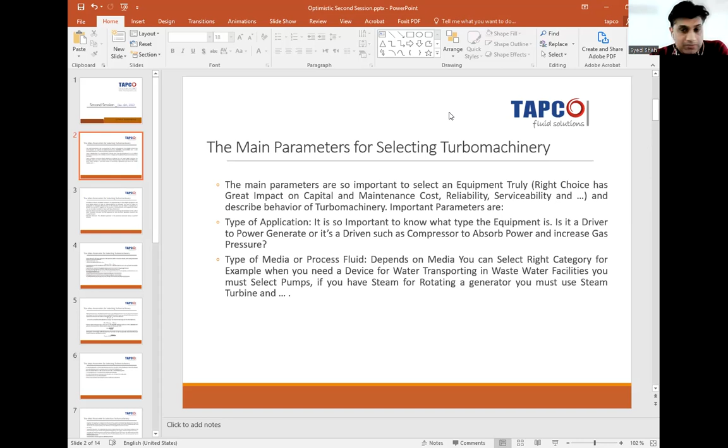Condition of the fluid is an important key to having the right equipment, and it has a major impact on the type of machinery. For example, you must select equipment to compress natural gas. In this situation, you can select a compressor, a blower, or a fan, but it depends on the pressure ratio and capacity or flow.

We can describe the condition of the flow with flow parameters. Pressure is the name given to the force exerted by fluid particles on the wall of the container. Pressure can be expressed in two methods: absolute pressure and gauge pressure. It's so important, since we're working with different pressures, for example static pressure, dynamic pressure, total pressure, and others.

We don't want to speak about this parameter now, since it will come soon, and after that we will discuss it completely.

Absolute pressure is the pressure measured above a perfect vacuum. Gauge pressure is the pressure which is measured directly, with existing barometric pressure, at zero base reference.

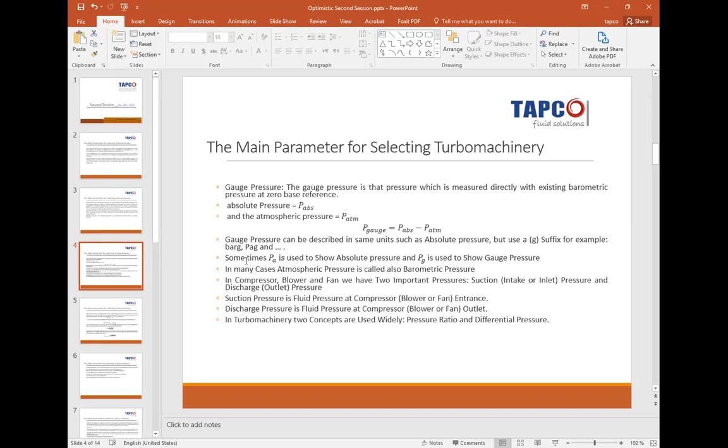Differential pressure is the difference between any two pressures measured with respect to a common reference, for example, differential pressure between two absolute pressures. It's expressed in pressure units without any suffix; we can show it with bar, Pascal, and other units, and represent it with the symbol delta P.

Delta P equals P2 minus P1. P2 and P1 must be either both absolute or both gauge. One should not be gauge and the other absolute. It's so important to use it only in one consistent concept.

For pressure ratio, we can define delta P in the compressor, blower, fan, pumps, turbines, and other equipment with these definitions: Delta P equals discharge pressure minus suction pressure. Pressure ratio is the ratio of the absolute discharge pressure to the absolute inlet pressure.

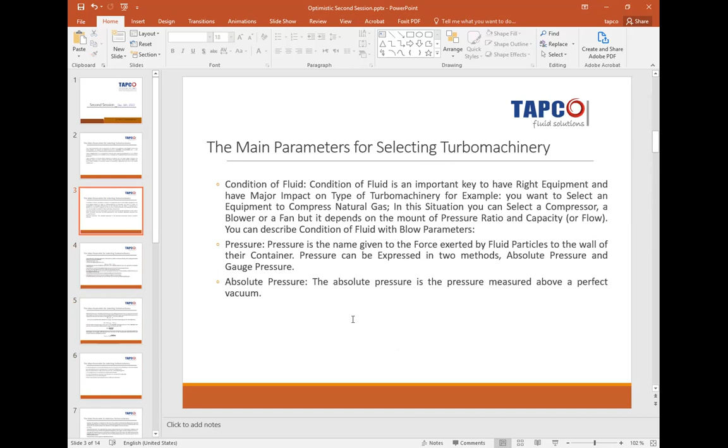Pressure ratio is a dimensionless value, shown with PR. It's so important that it's dimensionless. Pressure ratio equals discharge pressure divided by suction pressure, and there is an important point here again.

When we calculate pressure ratio, both discharge pressure and suction pressure must be absolute. This is important: if you divide discharge pressure by suction pressure in gauge, you get a wrong pressure ratio that cannot be relied on. So it's very important to make sure that whenever you calculate pressure ratio, both discharge and suction pressure must be in absolute.

But when you want to calculate differential pressure, both discharge and suction pressure, at the same time, could be either absolute or gauge. Is it clear? Yeah, it's clear, okay, should be good, both should be the same for delta P. For pressure ratio, both must be in absolute, not gauge.

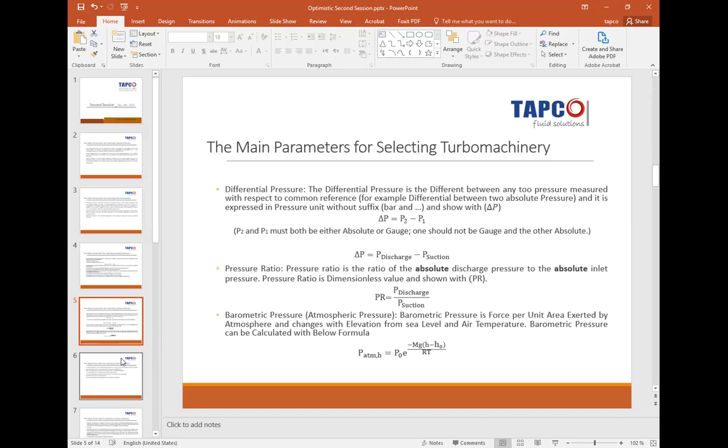You can calculate the barometric pressure with this, but it's not necessary because many sites on the internet let you calculate barometric pressure easily. I will show you.

In this formula, P with suffix 0 is the sea level pressure, equal to 101.325 kilopascal absolute, or 1013.25 millibar absolute. G is the acceleration due to gravity, equal to 9.80665 meters per square second.

M is the molar mass of air, equal to 0.0289644 kilogram per mole. T is the temperature at sea level, expressed in Kelvin. We will discuss about it.

R is the universal gas constant, equal to 8.31432 Newton meter per mole Kelvin.

Is it necessary to use this formula? No. For example, this site can calculate the barometric pressure for you easily. I will show you.

You never actually need to use that formula to get the atmospheric pressure at different sites, because there are so many tables, graphs, and even calculators that you can use to easily calculate the air pressure, or atmospheric pressure, or barometric pressure - those are the same. You can calculate them easily for different sites, different places. That's correct.

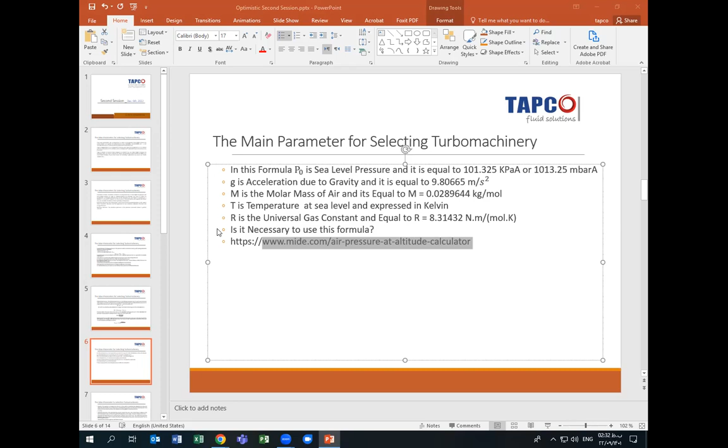I would recommend this to you from now on. I know this is going to be difficult, especially if you have not practiced it before, but my own practice tells me that if you try to understand the process, life will be much easier for you. Believe me, I know this is not very easy to do at first.

But if it starts with very simple processes and you try to understand the process, what do I mean by process? Always ask yourself what this machine that I'm going to offer is supposed to do. What is its job? What is the requirement for this machine? How is this machine going to be used?

How is it utilized by the client? In what process? What is that going to develop or generate, to give out? This is called process. If you understand the process, it will be much more understandable to you, the device that you want to design, select, and hopefully sell.

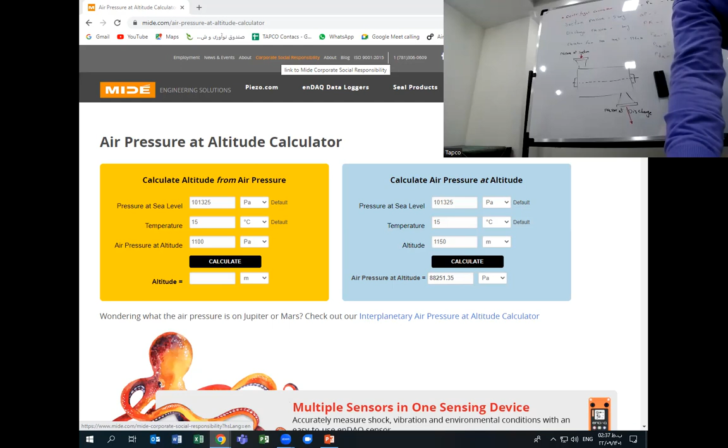How is it now? Is it okay now? Is it readable? No, it's not readable. If we close the presentation we are sharing, your screen will appear on the main screen, because now it's on the right side with a small screen which we cannot read. I'm not sure if I can convey my question. Yeah, if you can stop... Okay, yeah, it's much better now. Thank you, now we can see it.

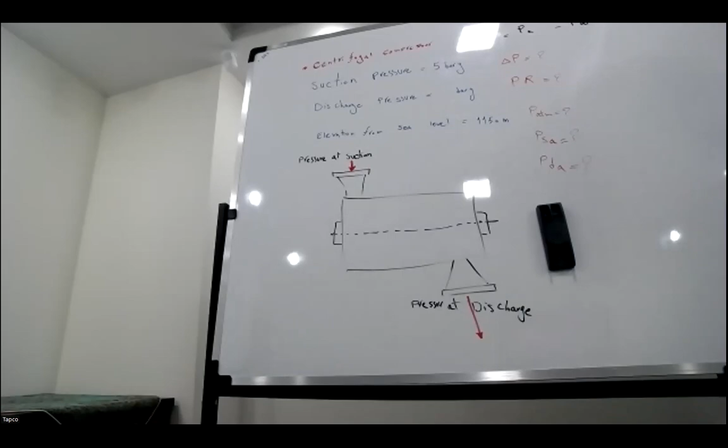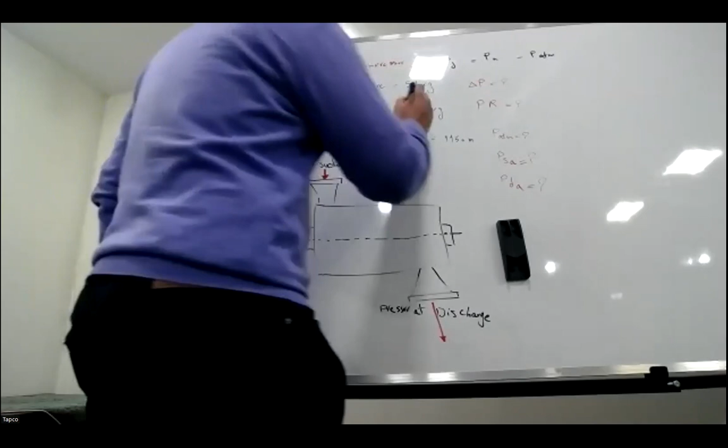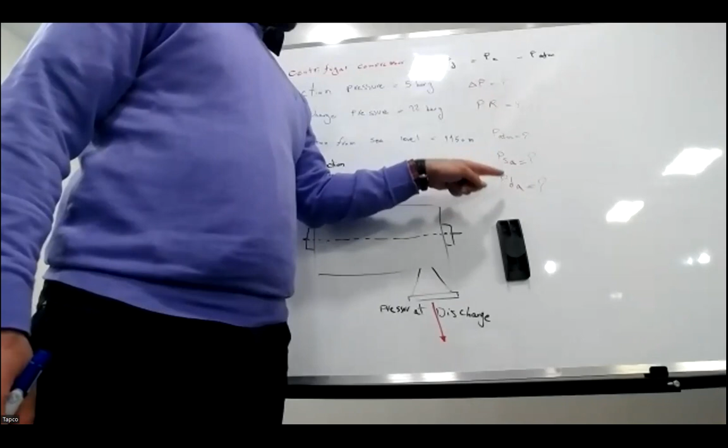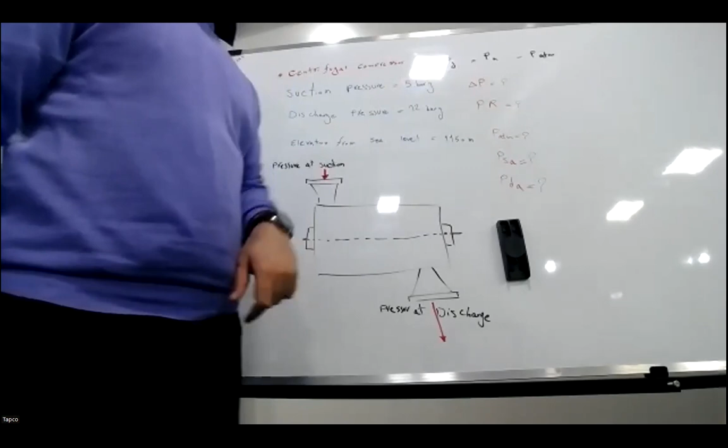We have a centrifugal compressor here with suction pressure 5 bar with suffix G, and the discharge pressure is 12 bar G. I asked you to calculate the suction pressure and discharge pressure in absolute terms, and after that calculate the pressure ratio and differential pressure. This compressor will be installed in a city with elevation from sea level of 1150 meters.

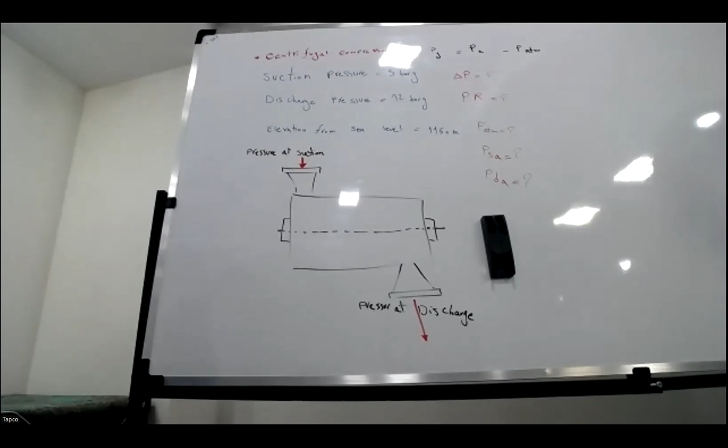Is the problem clear to you? We can see it, not very clear, but we can see it.

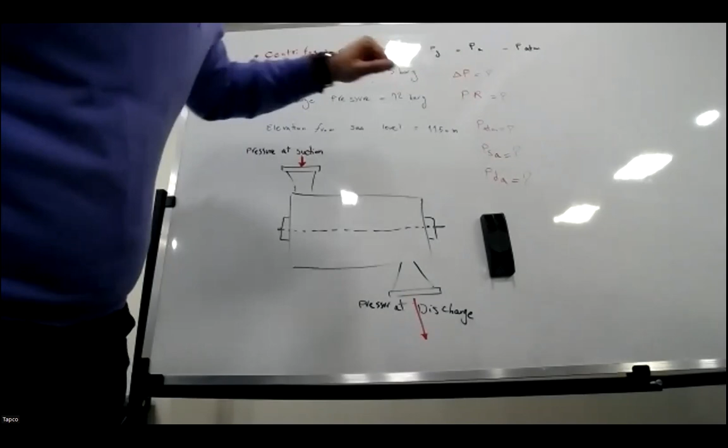Suction pressure is 5 bar G. Okay, discharge pressure is 12 bar. Suction pressure is 5 bar G, G means gauge, all right? And discharge pressure is 12 bar G.

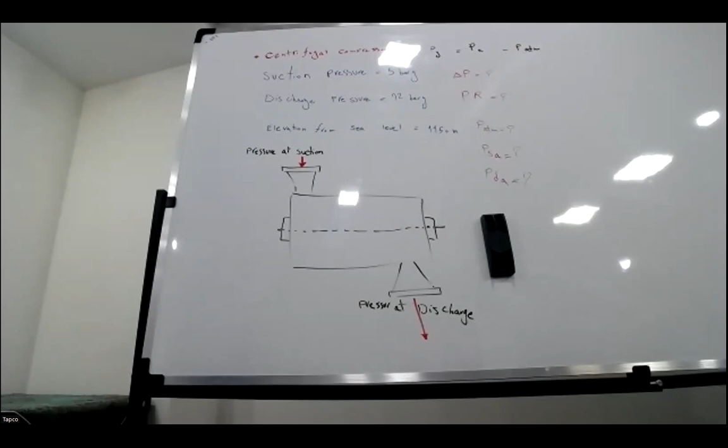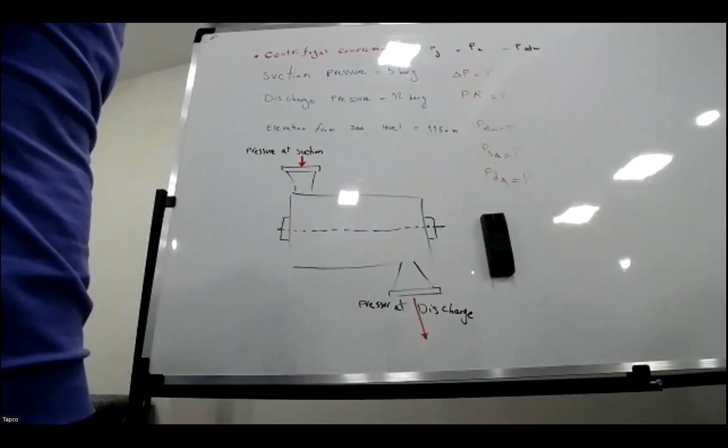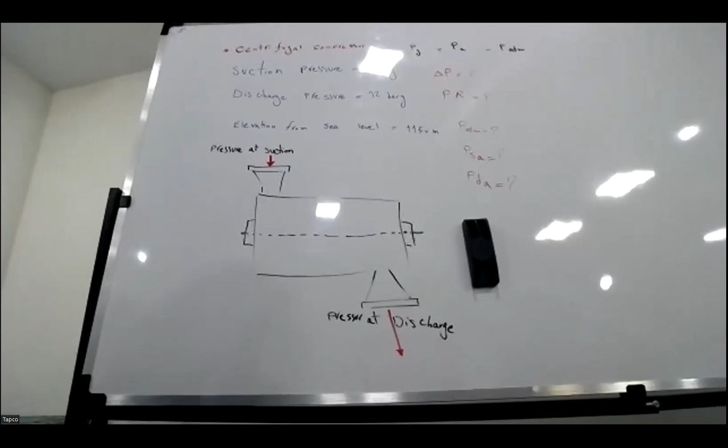So what do we need to derive now? Okay, and you need one more piece of information: the site elevation, the altitude at the site is 1150 meters above sea level. The first thing you actually need to know or to reach is the atmospheric pressure at the site.

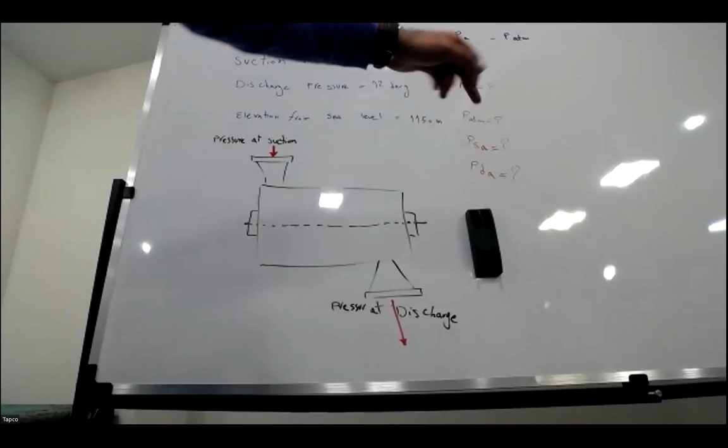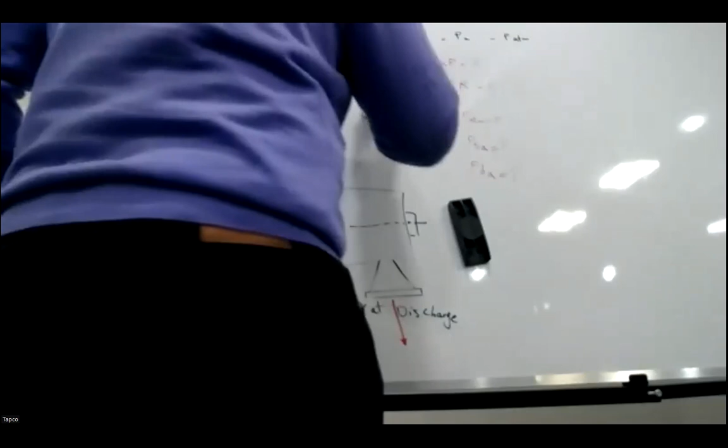And what other things need to be understood and adopted in order to calculate the discharge pressure? Is it 12 bar or 20? 12. No wait, 12 bar G, yes.

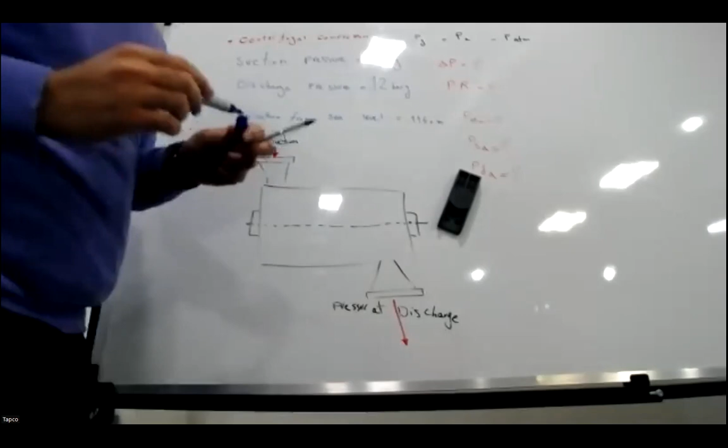And what do we need to derive, what do we need to get as the result? Pressure ratio, should we calculate the differential pressure, suction pressure, and discharge pressure in absolute terms, and atmospheric pressure.

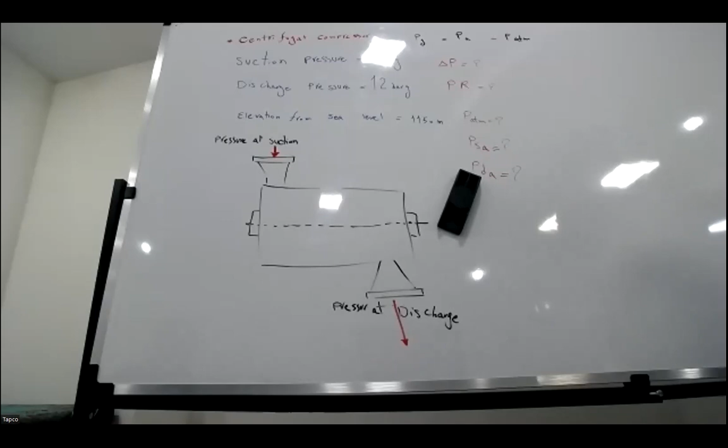So the differential pressure is 7 bar G. Yes, correct, but thank you for making a small mistake, because if you hadn't made this mistake, I would have forgotten to mention this typical type of mistake. Correct, of course the differential pressure is 7 bar, but we never say differential pressure is so many bar G or A, never. It is simply 7 bar, no suffix, no unit involved.

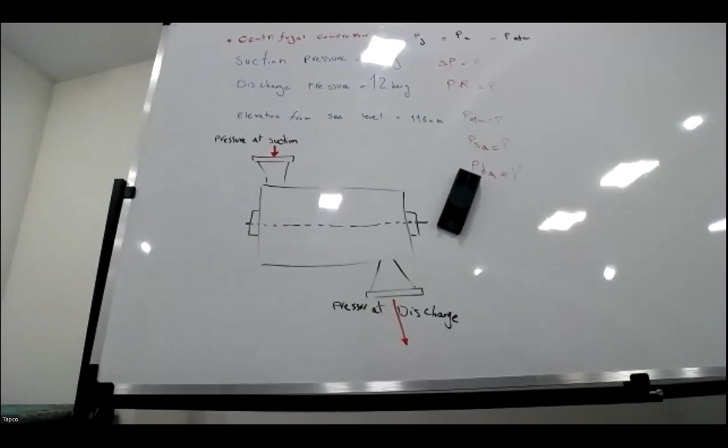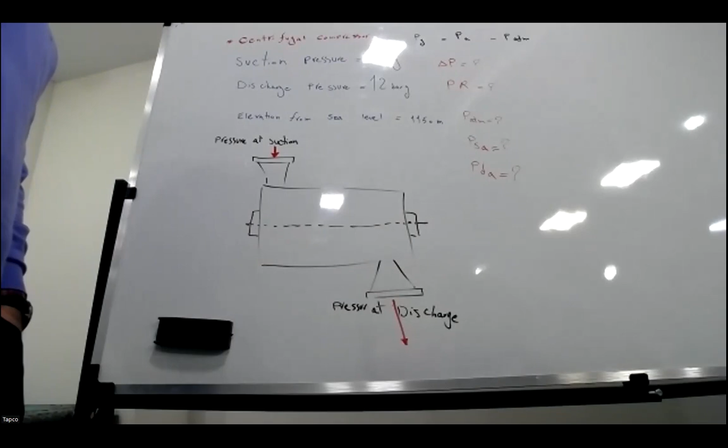No suffix after, when we say differential, both sides are either gauge or absolute. Am I correct? Differential means A minus B, P2 minus P1, all right? P2 and P1 are both either in gauge or absolute. If they are gauge, gauge from this side and gauge from that side cancel out. What remains is just bar. We never say differential pressure is 7 bar G, if it is gauge, it is not differential. We simply say 7 bar, or millibar, or Pascal, or bar, or atmosphere, or millimeters of mercury, or millimeters of water. These are all units for pressure, and there are even more.

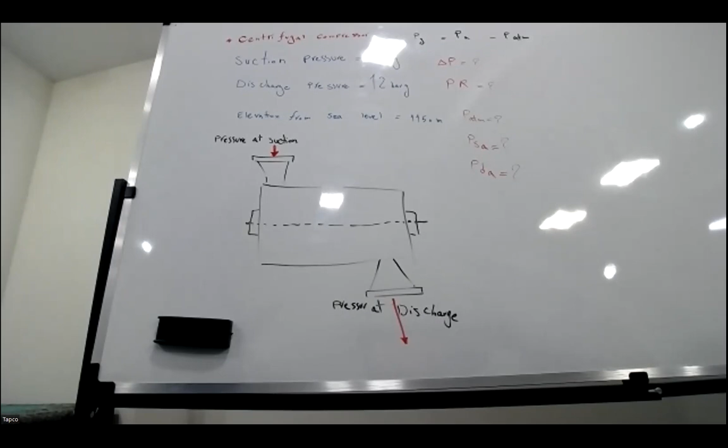So, and the pressure ratio is 2.4? No, no, sorry, please go back to the definition of the pressure ratio, please. Oh okay, it needs to be calculated with the absolute values. Exactly, this is extremely important. When you calculate it, you will see that it won't be 2.4, and that could have a huge effect or impact on the later calculations.

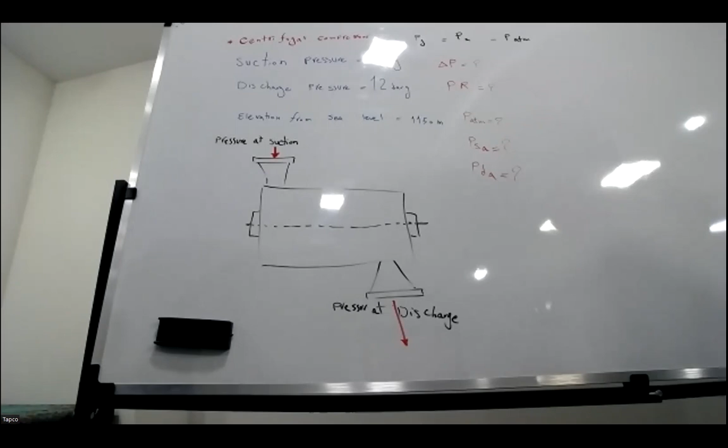Okay, ladies and gentlemen, if I'm allowed to give you a little hint. Do you hear? The one bar G is equal to how much 1 bar A?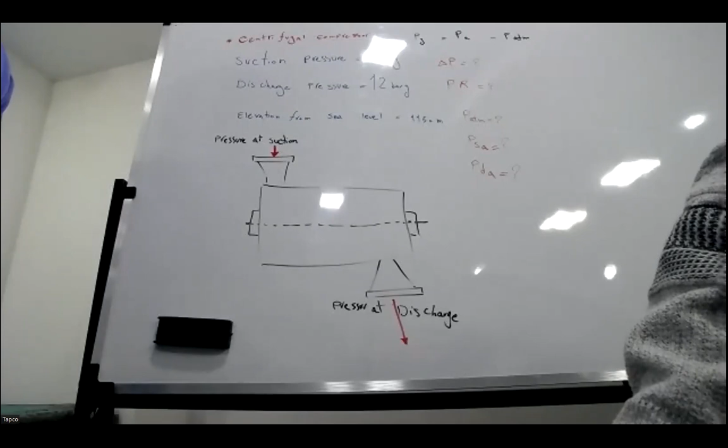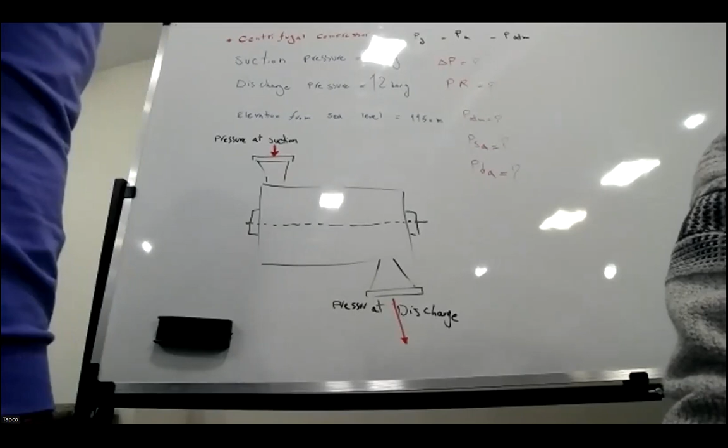Why do you need to know how much 1 bar G is? Because I want to calculate the bar G to bar absolute, then we could have our pressure ratio. That is why Mr. Ranchbarian has given you the elevation from the sea level. The elevation, the altitude, is 1,150 meters.

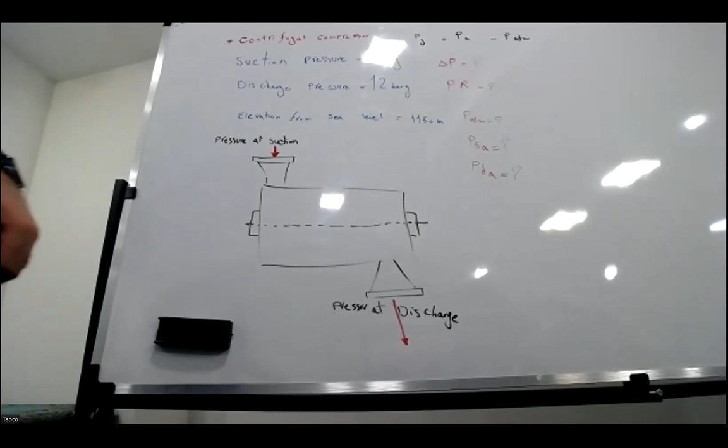That's correct. So what you need to know from that, I think it was slide 4 or 5, those graphs in blue and yellow. If you go over there, you can calculate. If you put the amounts in the boxes, you get the amount for the pressure at the site, at the elevation of 1,150 meters, and assume 15 degrees centigrade, 0 degrees centigrade. What it is there is not that important at the moment.

Okay, can you see this screen now? Yeah, we can. Okay, please.

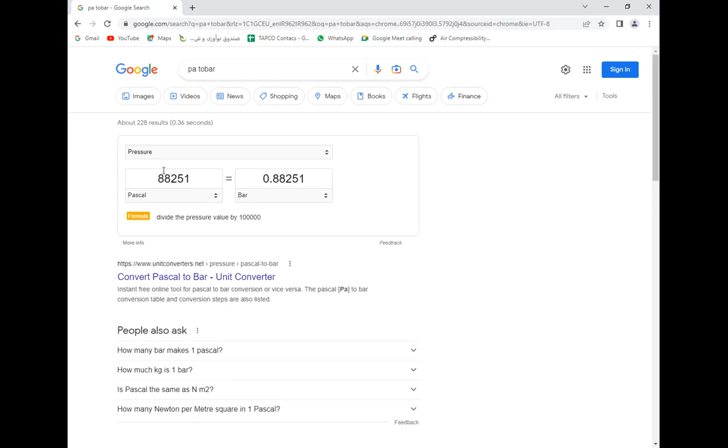Say it again. Pressure ratio is the ratio of discharge pressure divided by suction pressure, both in absolute amount. You have the suction and discharge in gauge, so first of all you need to convert it to absolute.

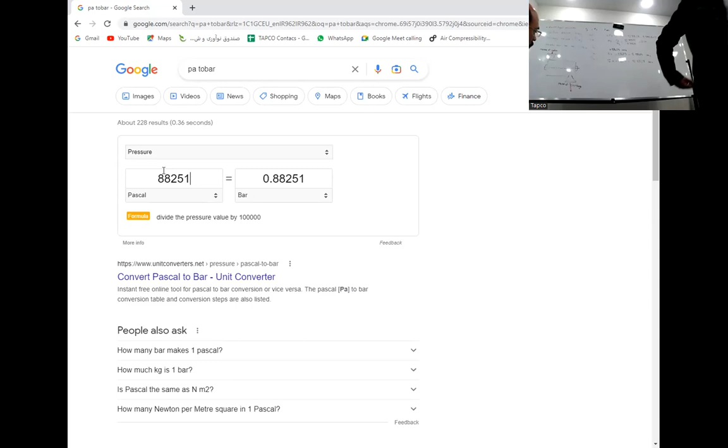We discussed this, I think it was on slide 3 or 4. For P absolute, you should add atmospheric pressure at the site to the gauge pressure that you already have. So normally we add 1 to the gauge pressure in order to get the absolute pressure.

Again, that is correct if you're at the seashore. But in this example, you are not at the seashore. You are at the elevation of 1,150 meters above sea level. So the atmospheric pressure changes. You are not at your town.

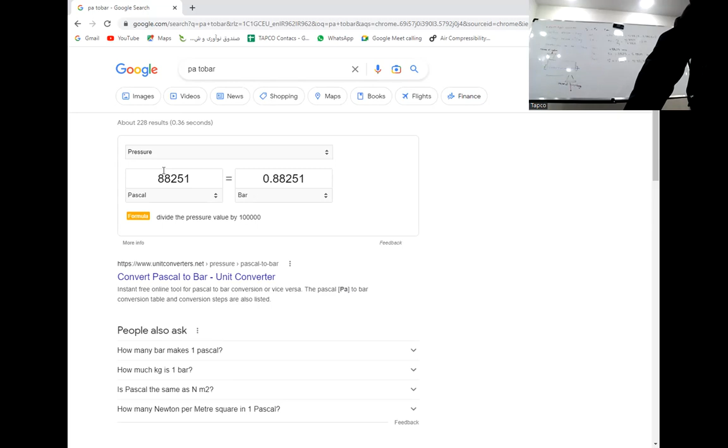You have gone to the mountains. Are there any mountains close to you? So it means it will add the additional altitude height. Am I right or not? No.

From the altitude that you have, you should find the amount of air pressure at that altitude. You see, altitude is 1,150 meters. Am I correct? That's correct.

Now go to that page Mr. Rajbarian showed regarding calculation of the atmospheric pressure over there. You see this page? 1150, yeah, 1150 is the altitude.

Calculate the air pressure over there on the blue table. 88251. Exactly. What is the unit for that figure? It's Pascal. It is Pascal, but we want it in bar, so we have to divide it by how much? 0.8825. Exactly, it's going to be 0.8825 bar.

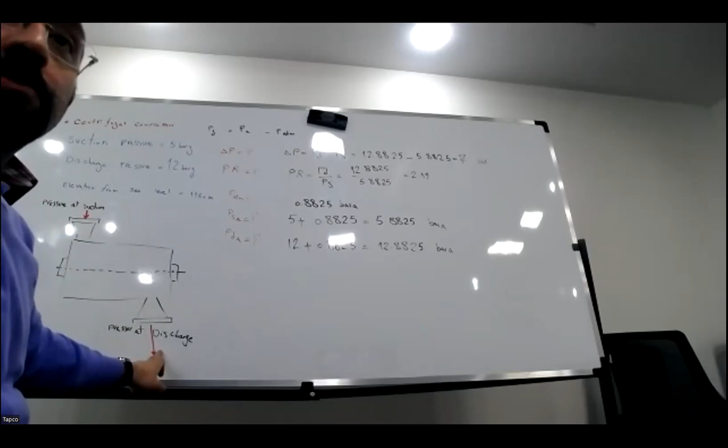Yes, okay. After that, we must calculate the suction pressure at the entrance of the compressor, and the discharge pressure at the outlet of the compressor in terms of absolute pressure. We have 5 bar gauge at the suction pressure. See this formula? Gauge pressure equals absolute pressure minus atmospheric pressure. Did you understand? Yes.

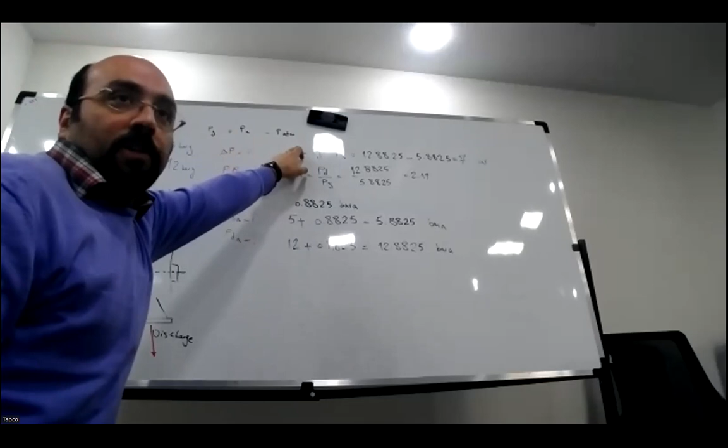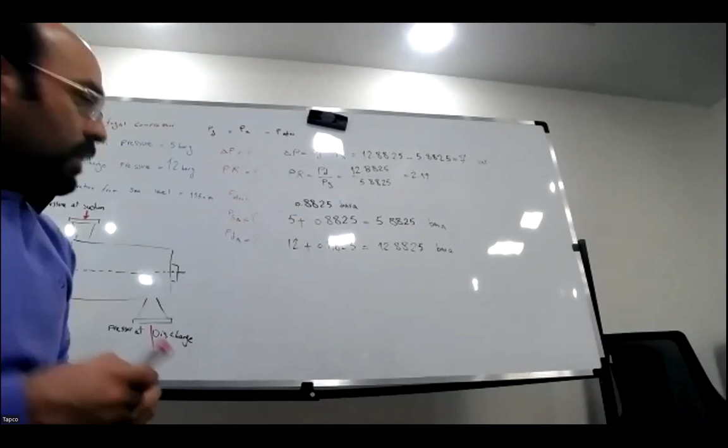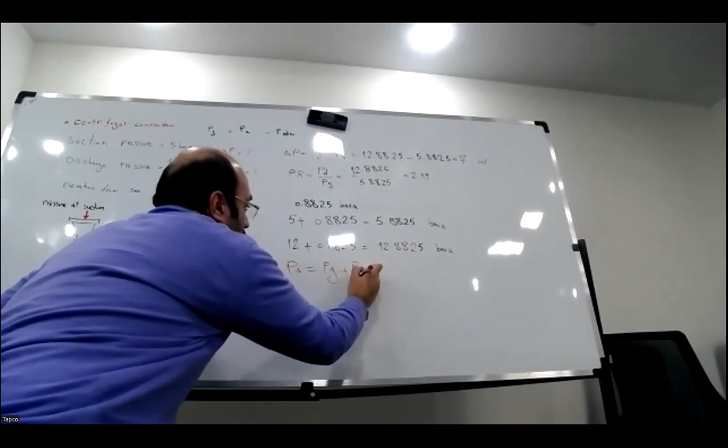Okay, you can calculate absolute pressure as gauge pressure plus atmospheric or barometric pressure. See here, we have the 5 gauge. Can you see that? Yeah. Okay, absolute pressure equals gauge pressure plus atmospheric pressure.

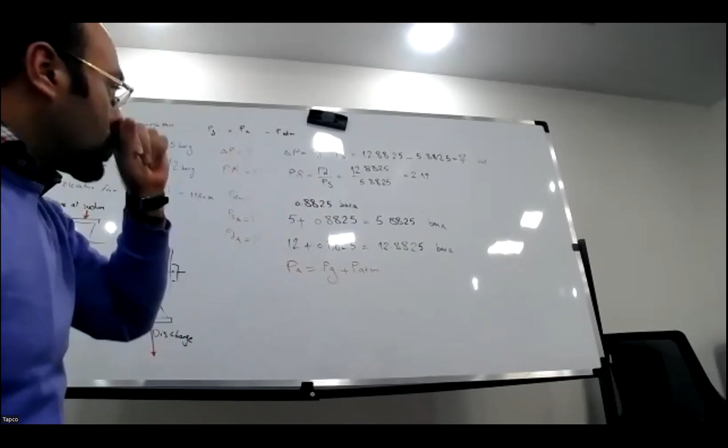You calculated absolute atmospheric pressure equals 0.8825. You have suction pressure and discharge pressure in terms of gauge pressure. You add these two terms to calculate suction pressure and discharge pressure in absolute terms. See here, 5 plus barometric or atmospheric pressure is suction pressure in absolute terms. Can you see here clearly?

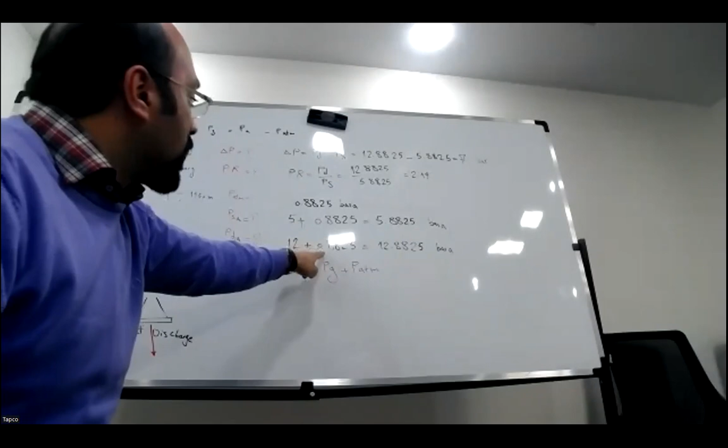Absolute, yeah, okay. For discharge, 12 plus barometric pressure equals 12.8825 for absolute. Is it okay? Yeah, okay. After that, you calculate the absolute pressure, then you can calculate differential pressure and pressure ratio.

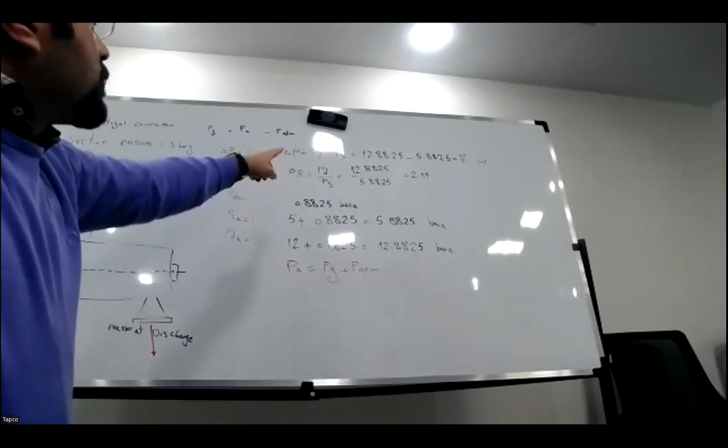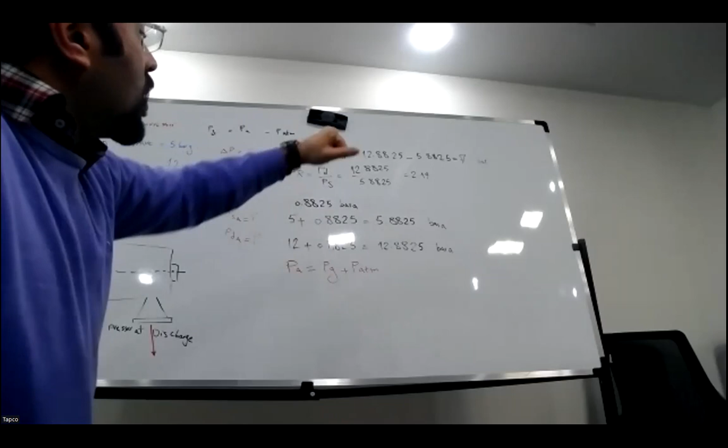For differential pressure, you take discharge pressure minus suction pressure, in the absolute term. Discharge pressure absolute is 12.8825 minus suction pressure absolute 5.8825, it's equal to 7, as you calculated.

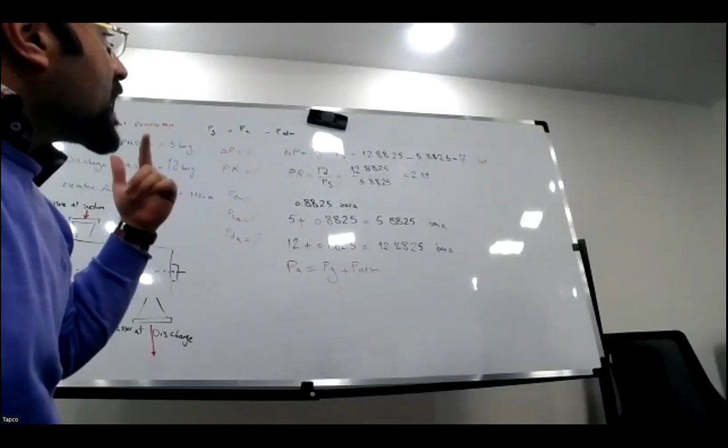Okay, is it okay? Any question? Clear. Okay, for pressure ratio, you can divide discharge pressure by suction pressure in terms of absolute pressure.

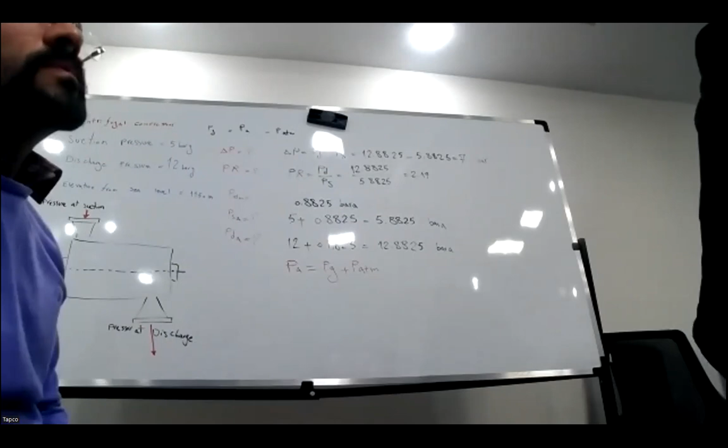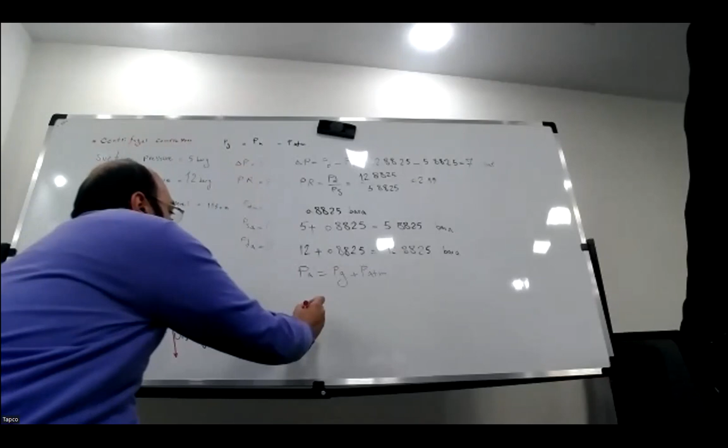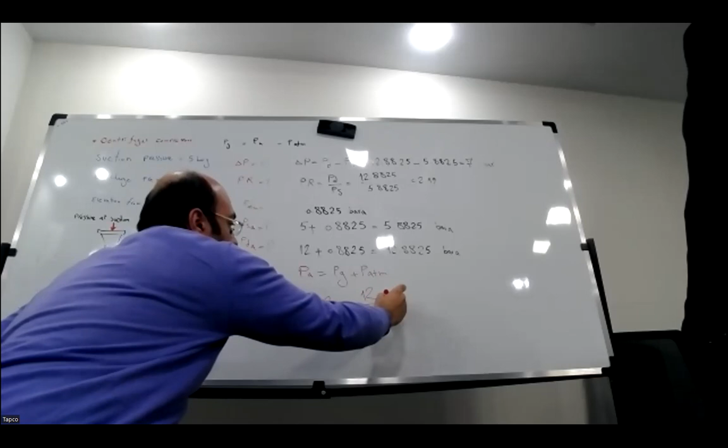12.8825 divided by 5.8825 is exactly 2.19. You remember, Sayed, you told me first that the pressure ratio is 2.4. Correct, the correct pressure ratio is 2.19, which is lower than 2.4, and this is important in the calculations.

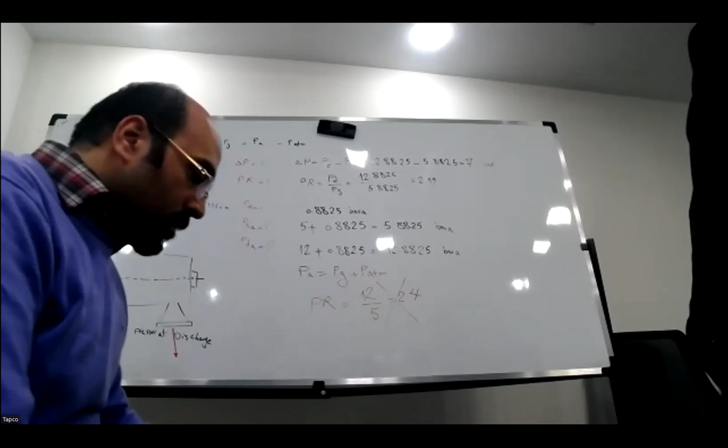This matters in the next calculations for the design of the equipment.

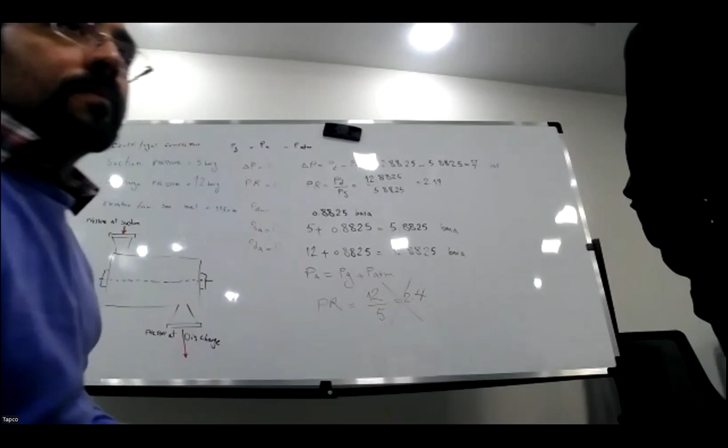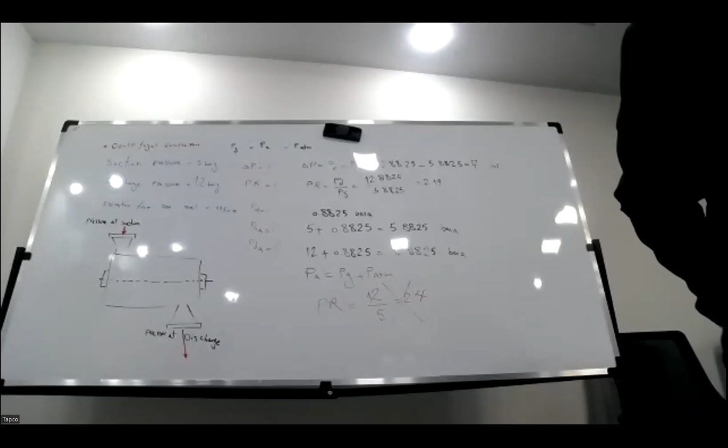So is it clear to everybody? Any questions, please? For me, it's clear. Okay, Svetlana, Claudius, the other ladies. Yes, thank you for the more detailed step-by-step way. Thanks, please. Okay, now we continue with the presentation.

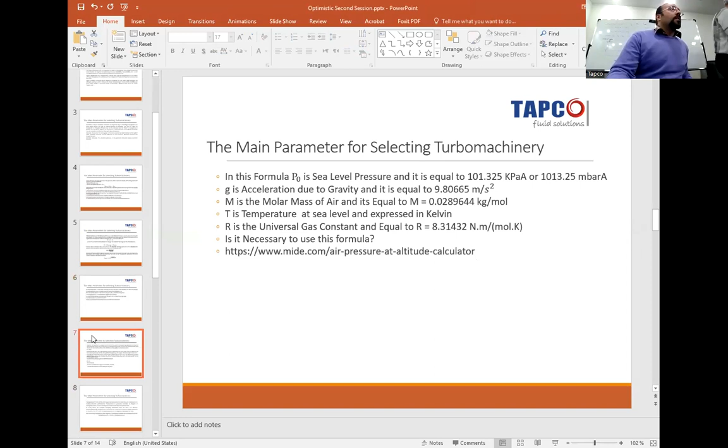Volumetric flow rate: the volumetric flow rate or volume flow is defined as the fluid volume passed per unit time through a flow body, such as a pipe, channel, compressor, and other. Generally, the volume flow rate is denoted by the symbol Q. The SI unit of volumetric flow is cubic meter per second. Cubic meter per hour is also used as a unit of volume flow rate in turbo machinery. Flow rate is also measured in cubic feet per second, or CFM, cubic feet per minute, in the imperial system.

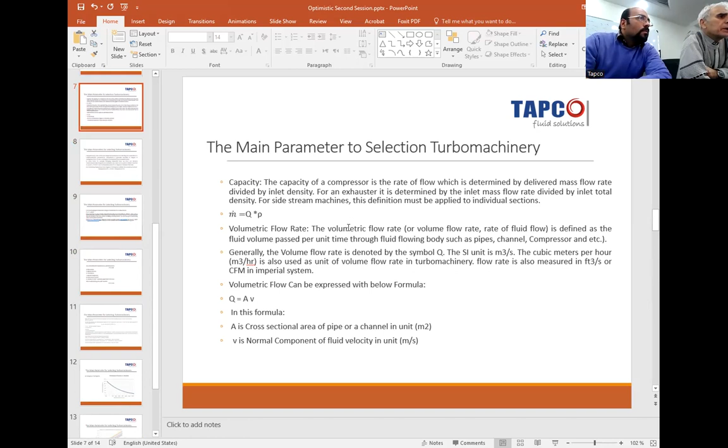Thank you. Okay, regarding flow rate, I'll go very quickly because Mr. Ranjbarian has so many other things to tell you. Remember, there are two types of flow rates given in the data sheets. Some clients give it in volume flow rate, volume, and the amount is given in cubic meters per second or cubic meters per hour or cubic feet per hour, so on and so forth. This is the volume.

The other type for the flow rate that might be given in the data sheet is mass flow rate. Mass flow rate means the amount of mass, not volume. Mass flow rate is always given in kilograms per hour, not cubic meters per hour - kilograms per hour, or pounds per minute, pounds per hour, pounds per second, or grams per, let's say, second. These are all masses, not volumes.

And remember, in a compression scenario, in a compression process, what always remains constant - no matter what you are doing with that flow, with that gas or air - what remains always constant is mass flow rate. Volume flow rate changes. Why? Because when you compress a gas or air, the volume decreases. That's simple. But the amount of mass never changes.

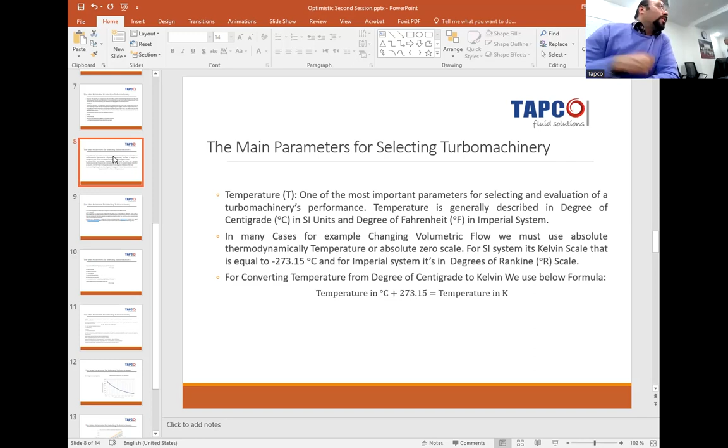Okay, Mr. Sadri spoke about flow converting, normal flow and standard flow. Now we want to speak about it further. Flow converting: in many inquiries, volumetric flow rate may be described in different terms, such as normal flow rate or standard flow rate, and we must convert it to actual volumetric flow rate or vice versa. Before describing the converting method, we must have a good understanding of the state equation for an ideal gas.

Anyone can define for us what an ideal gas is? In case you are tired and want some rest and refreshment, please tell us.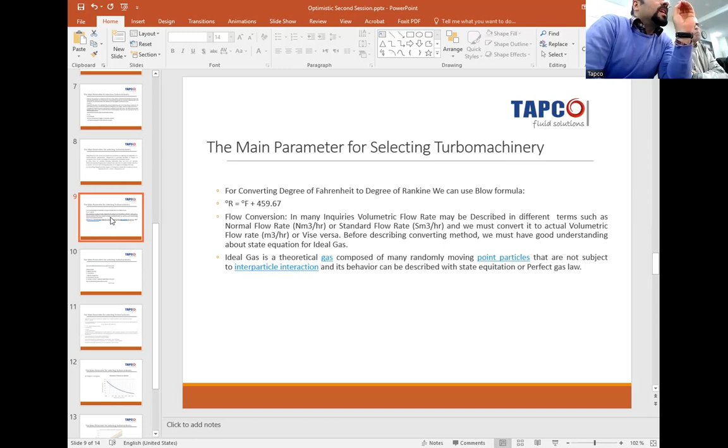No? Okay, let's go. Ideal gas is a theoretical gas composed of many randomly moving point particles that are not subject to interparticle interaction, and its behavior can be described with a state equation or perfect gas law. It's an important equation for us.

We can describe the perfect or ideal gas law with this equation: P multiplied by V is equal to M multiplied by R multiplied by T. In this equation, P is absolute pressure, V is total volume, T is absolute temperature, R is the universal gas constant, and M is the number of moles multiplied by molecular weight, or mass of the gas.

We can write the perfect gas law in a new form: PV divided by T is equal to MR. The right side of this equation is a constant, and therefore we can compare two different states of the gas with each other. For example, PV divided by T in state 1 is equal to PV divided by T in state 2.

To use this equation for converting flow, we must divide both sides by time. We can use this equation for converting the state of the flow: Q1 is equal to Q2 multiplied by the pressure ratio, multiplied by the temperature ratio, multiplied by the compressibility ratio. About compressibility, we will discuss completely at the next session.

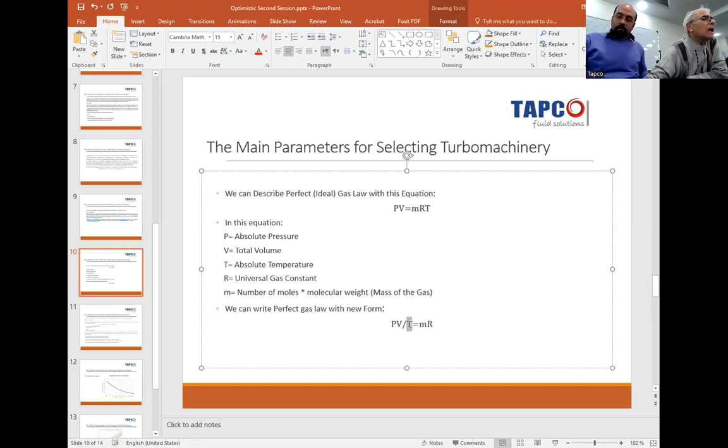The other point Mr. Ransberry also mentioned is that P must always be absolute, never gauge, never. It has to be always in absolute amount. And T is Kelvin, not centigrade. How do we get to Kelvin? We just add 273 to the centigrade temperature. For instance, if the temperature is 23 degrees centigrade, plus 273, it's going to be 300 degrees Kelvin. So T is absolute temperature and P is absolute pressure.

Sorry, Mr. Sadri, please. So in the first equation, you said that it should be a Z before M, correct? Yes, in general. So what does this Z mean?

The Z, as I told you, letter Z is compressibility factor, and it shows the amount of deviation from the perfect gas law. This is the figure for the perfect gas, this equilibrium. But in reality, there are gases which are really close to PV equal to MRT, very close to perfect gas. But in reality, because of different temperatures and different pressures, this equation is correct if you put a Z in front of M, so that it reads PV is equal to ZMRT. Z is called compressibility factor, but it is still close to 1, not exactly 1, close to 1.

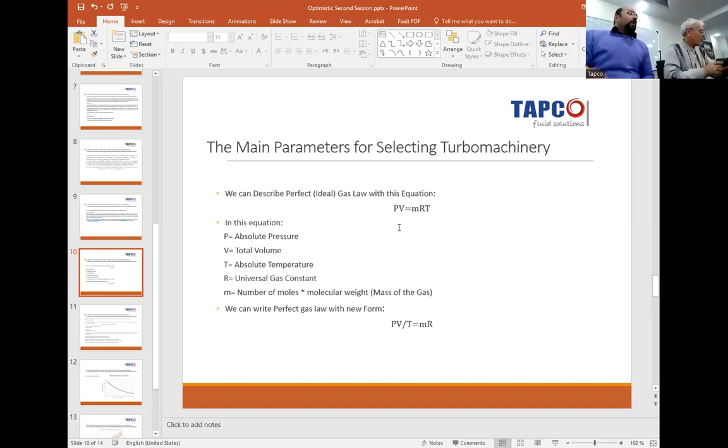You can use this site to calculate the compressibility too. There is a link for the compressibility factor given in the presentation.

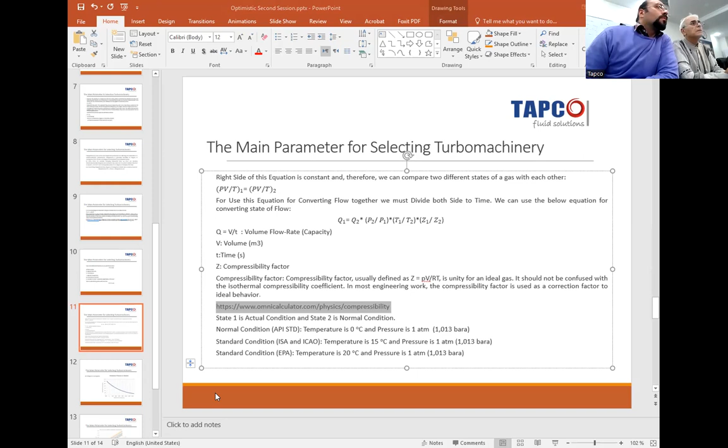Can you see this? Yes, we cannot see the screen, we see the PowerPoint, not your screen. Now we can see, now we can see, okay.

This address has been given in the presentation. If you go to this link for calculation of Z, you use it by giving the pressure, volume, number of moles, gas constant, and temperature. Again remember that temperature is in Kelvin, not centigrade, and that pressure over there is absolute in the first line, all right?

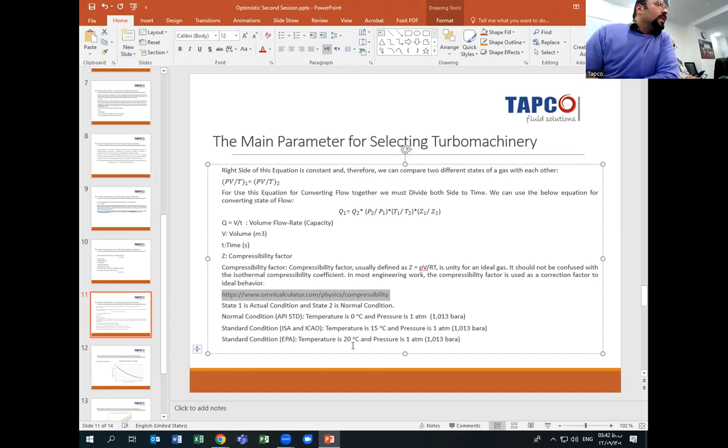State 1 is actual condition and state 2 is a normal condition. You can define normal condition per many standards. For example, normal condition in API STD is temperature 0 degrees centigrade and pressure 1 atmosphere. In the ISA and ICAO standards, standard condition is 15 degrees centigrade and 1 atmosphere for pressure, and standard condition for EPA is temperature 20 degrees centigrade and pressure 1 atmosphere.

This is the standard condition actually used by Russian, Tajikistan, Uzbekistan and CIS countries. This is the way they define or specify standard condition. But in the rest of the world, it is 15 degrees centigrade, not 20. The pressure is the same, it is the pressure at the sea level, all right.

Okay, at the next session, we're converting a flow rate to a normal flow rate example to actual flow rate.

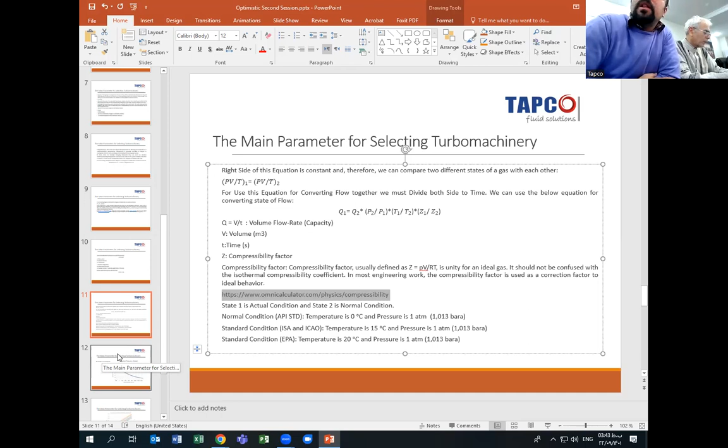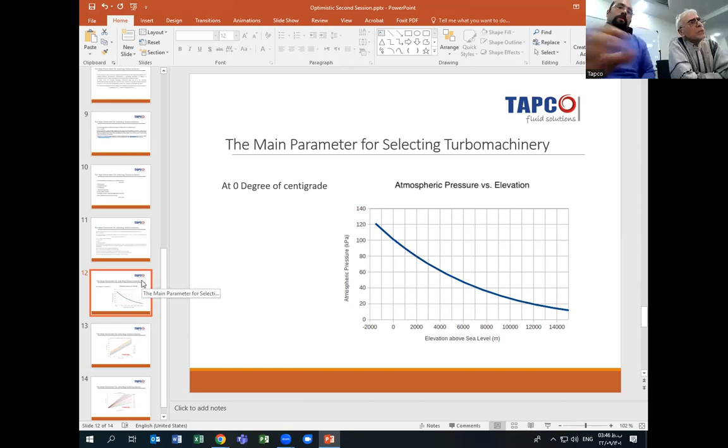On the other hand, when you go to sea level, it's the best with respect to the amount of oxygen in the air, or generally the air itself.

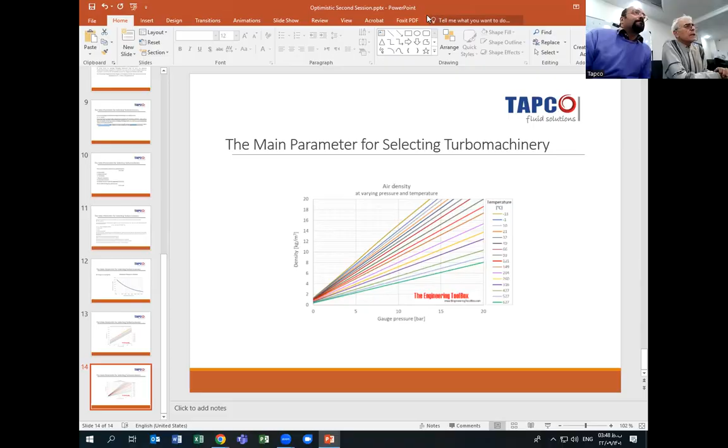Okay, is it? Okay, thank you so much. It's finished. That was the last slide actually on this presentation.